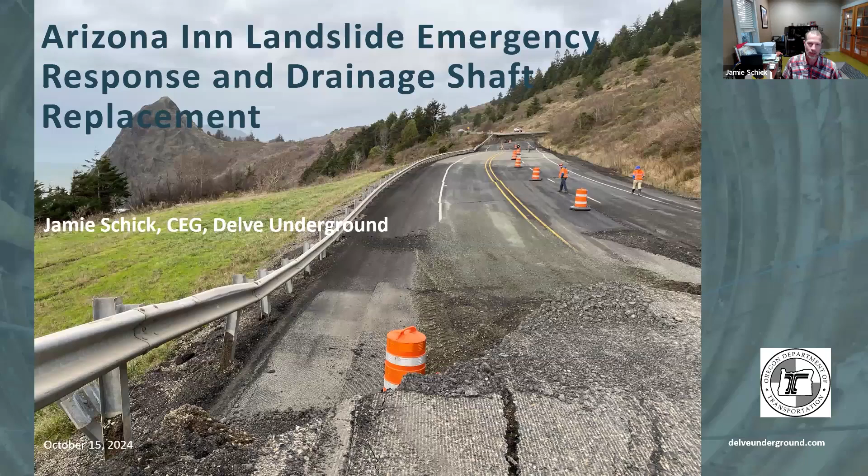This is a project that I've been on and off involved with for many years. It's got a long history that I'll get into today. It's got a fascinating mitigation and some new mitigations that we'll be talking about today. So just kind of an agenda for you. We're going to start with just a little bit of history. What happened in the 90s with the initial mitigation of this slide, some of the work that they did once they started seeing additional movement, and then get into a failure from January 23, talk about their initial response, and then what we've done since then with more additional mitigation out there.

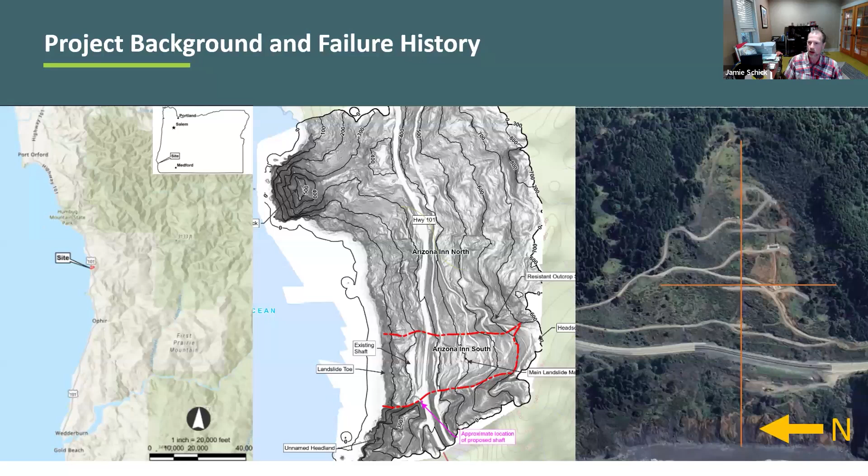So just a reference for everybody, you can see on the left, we've got the Oregon coast. This is down near the California border. The site's on Highway 101 in a very remote part of the state. The central image gives you a sense of the general dimensions of this slide in red, and then as well over on the far right, just to get a bit of a sense of orientation. It's about a half mile long and about a third of a mile wide.

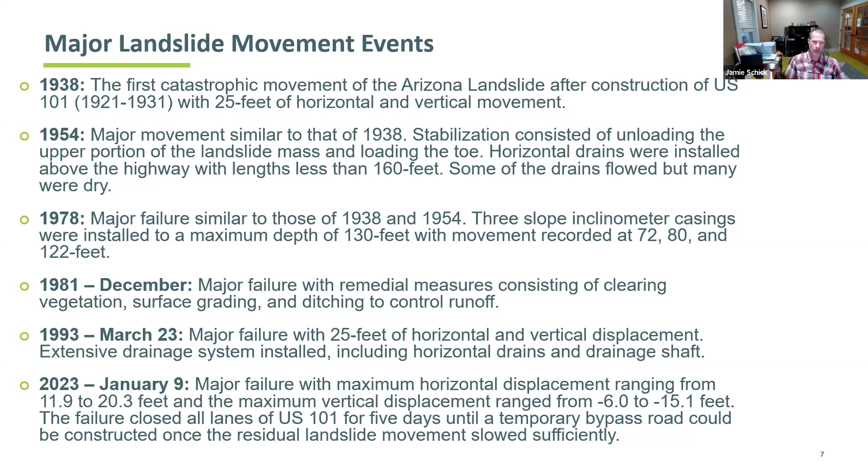So this slide's been active really since they built the road, and every 15 to 20 years it's had some fairly substantial movements that have shut the road down. In the 1950s, they moved about 500,000 cubic yards off the top, trying to unload the landslide. Which again slowed, but again it failed in 1993, which precipitated a major mitigation, and then of course the January failure last year that we'll be talking about today.

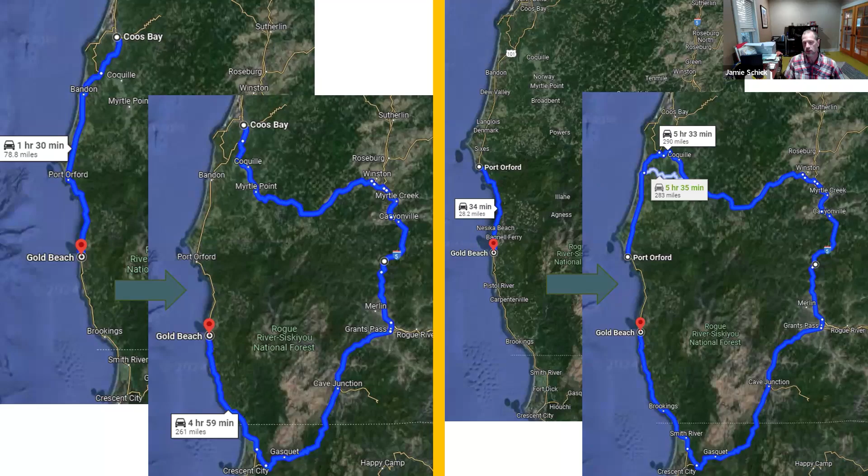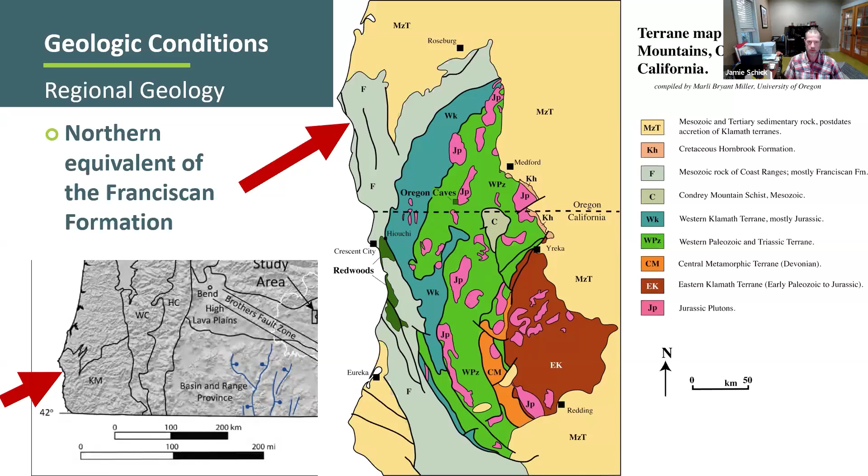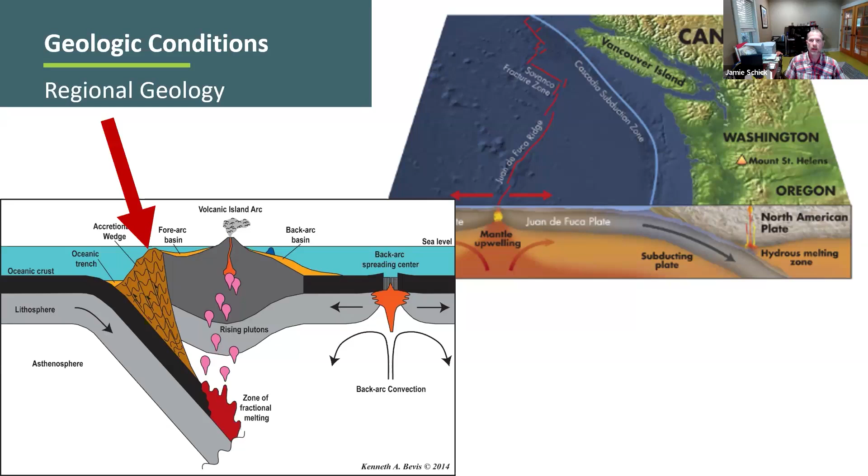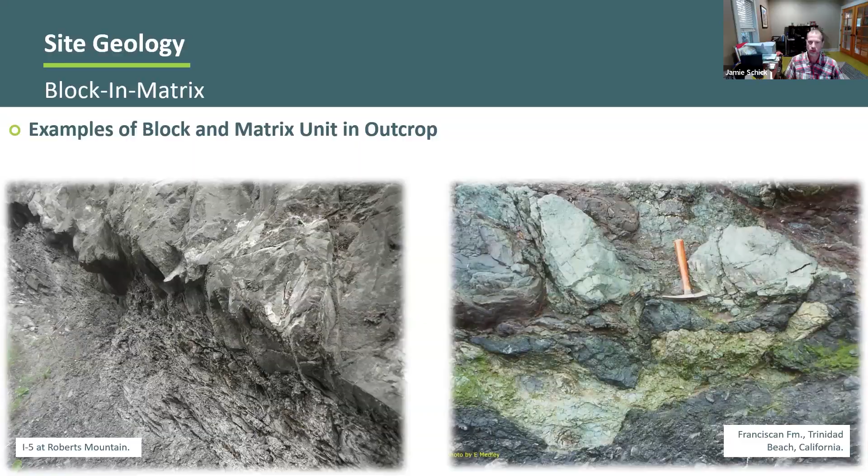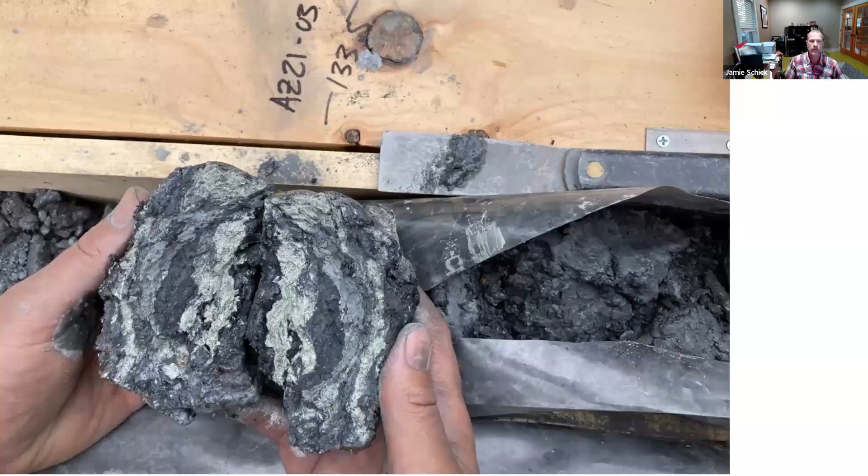There's another sample. These are all samples from the project that we collected last year. And just one more example of the kind of material that we're pulling out of the ground. So this is another view. This is a hillshade image of the site. We're really talking about what's also known as a block and matrix material, so blocks of material in a fine grain or mixed material matrix. And the scale of this goes from a hand sample that you just saw to huge blocks.

The arrows are pointing to large blocks that are in an even larger landslide that is slowly moving towards the Oregon coast. And rafting along in those are blocks on the order of 1,000-foot thick, 2,000-foot thick. So the scale is quite large here. In fact, one of the largest ones on the site is this one right here. This is a large block of sandstone that most likely prevented the landslide from moving further to the south.

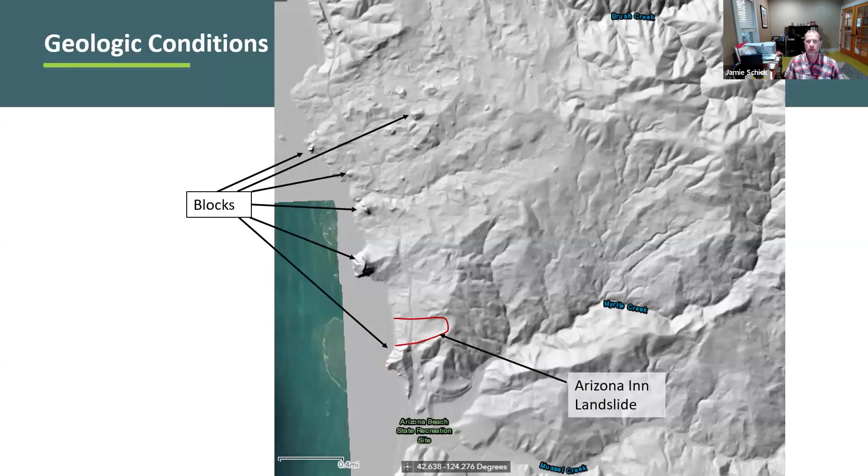Some of the unusual parts about this is that the toe of the landslide has a very steep face and is being very actively eroded away by the ocean. That's one of the challenges to the site and stabilization: we keep losing the toe material, the buttressing material is being washed away. Access is extremely challenging, so doing work on that face is very hard, if not impossible.

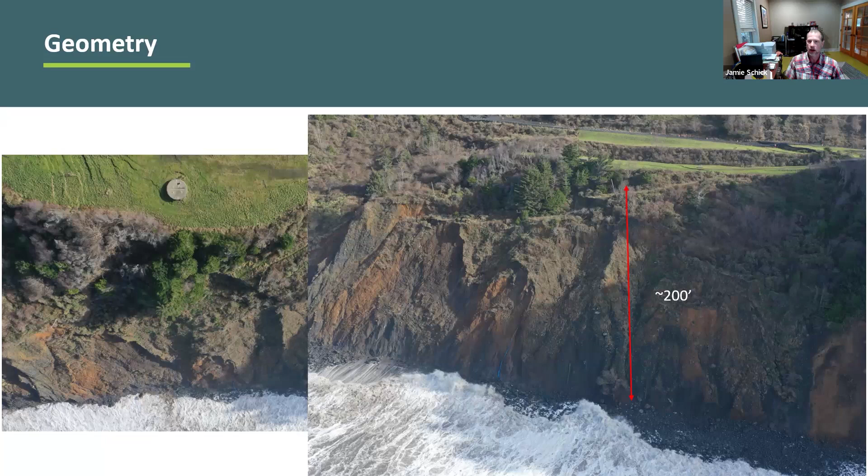So following the 1993 failure, the Oregon DOT decided that enough was enough, and they brought on Squier and Associates, who conducted a fairly in-depth investigation: the typical borings, inclinometers. They actually did pump tests to understand the hydrogeology better, because of the issues with putting a buttress in or anything along those lines. And they ultimately decided that drainage was a viable option.

To address the lower portion of the slide, they installed drains through a shaft. They built a 200-foot deep shaft, about 18 feet wide, in the middle of the landslide. Then they sent a work platform down and drilled horizontal drains from 3 separate work platforms and put in about 30,000 feet of drains to try to dewater the landslide toe.

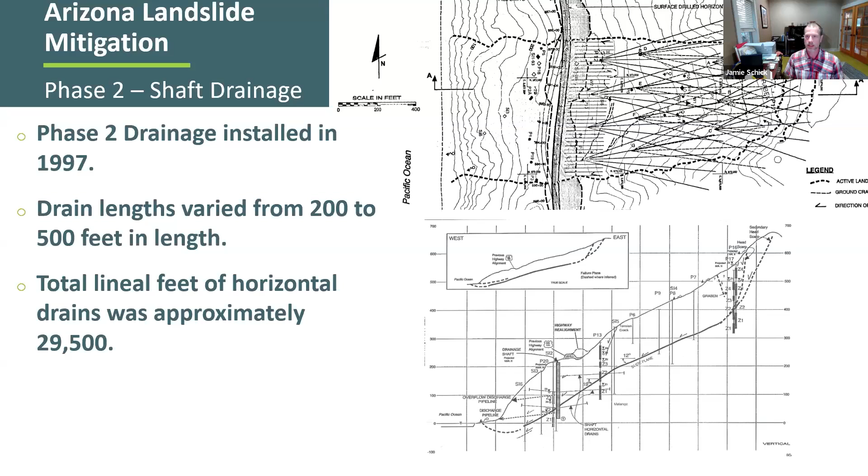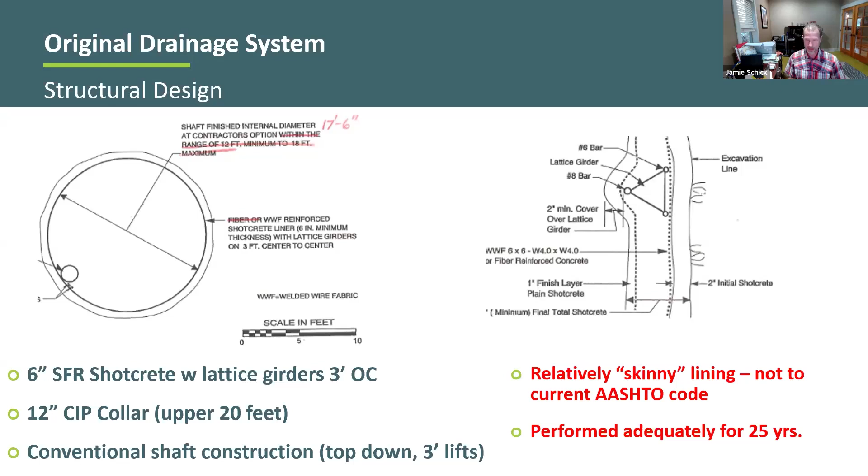From a support standpoint, the original shaft had about 6 inches of shotcrete with lattice girders on a 3-foot center. There was a collar at the top. The structural engineers that I work with consider this a relatively skinny liner, but it did hold up. It's actually still out there, at least parts of it, and so it did its job for close to 25 years.

So in the mid 2010s, they started seeing more deformation of the roadway, and concerns about what's going on. Is the system starting to reactivate? There's also movement in a larger slide to the north. You can sort of see it; the whole thing is outlined in red. That's called Arizona North versus Arizona Inn. The whole site is called the Arizona Landslide Complex. So they wanted to take a closer look at the whole site, understand what's going on out there, and whether there were other issues they needed to be concerned with.

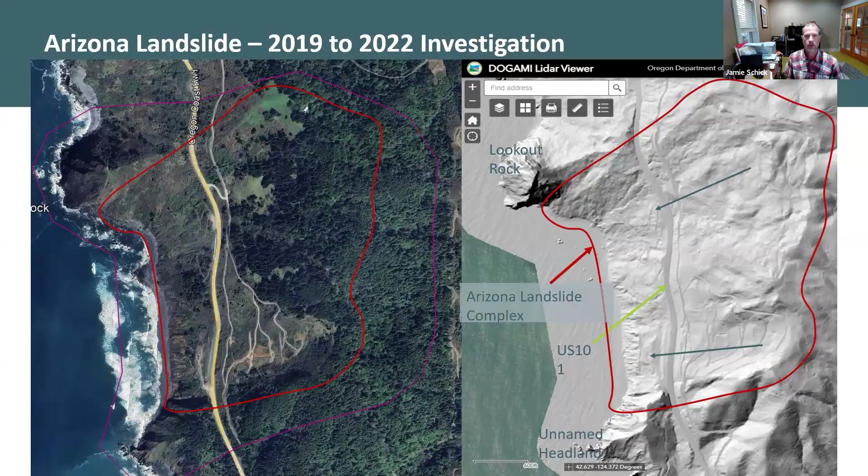One of the first tasks was to install a larger network of borings with instrumentation, so inclinometers and vibrating wire piezometers. They put in an additional 8 boreholes spread across not just Arizona Inn but also to the north, to get a better sense of what's going on out there. Are there areas where they haven't done anything that they need to be concerned with?

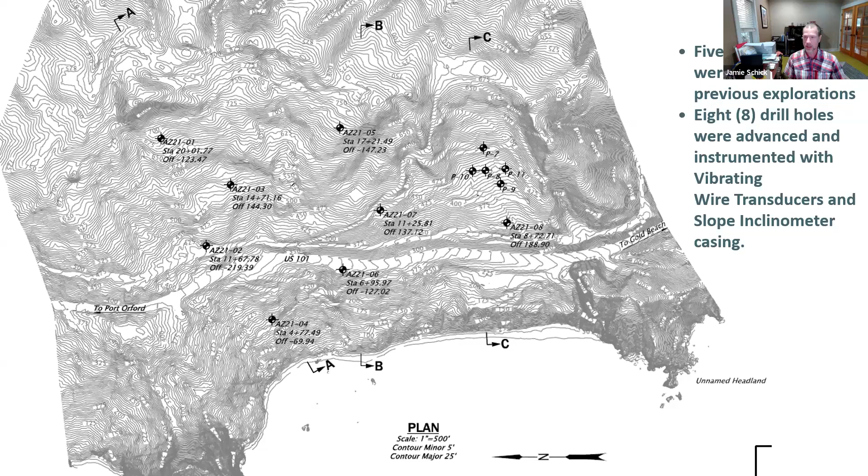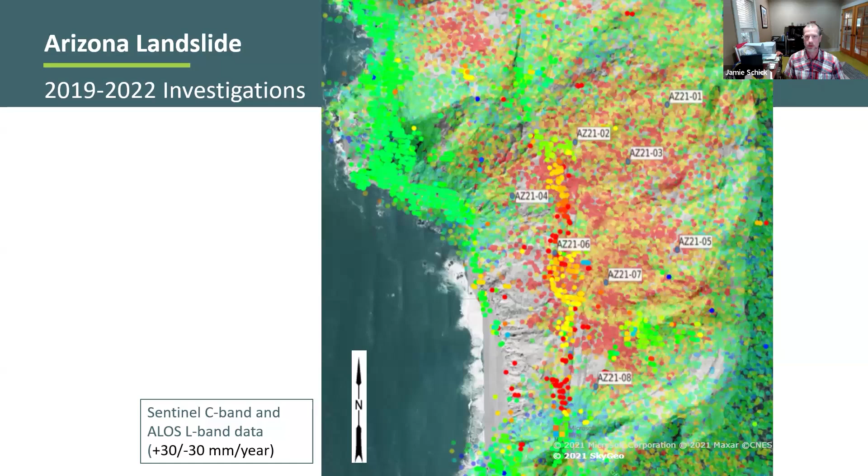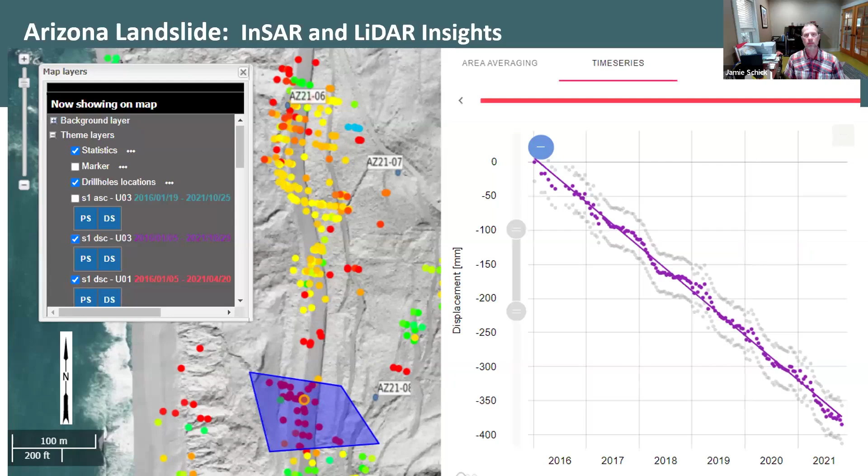We were fortunate that there were several rounds of LiDAR that have been flown for the site. So this is change detection. LiDAR is a scanning technology that uses a laser to scan the ground surface and create a topographic rendering. If you do that more than once, you can compare the two to see if there's movement. Again, red is moving, and blue is actually sort of showing negative movement, or moving in.

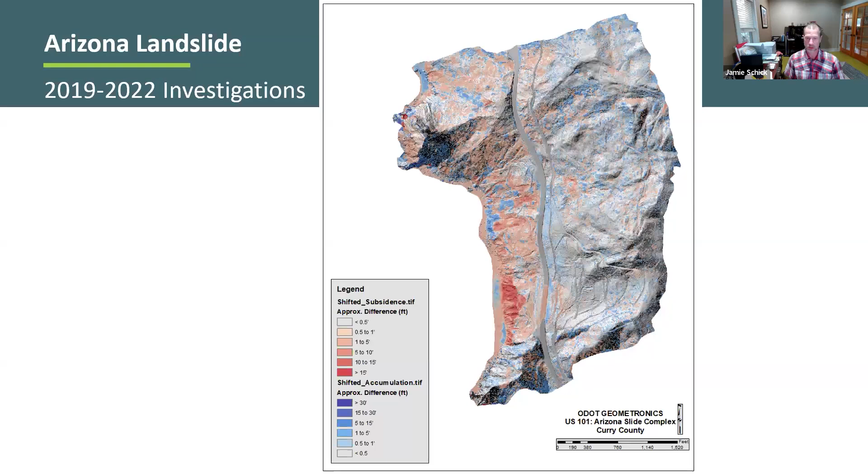So there's a lot of scatter here, but you can certainly see at the toe a fair bit of activity, mostly probably related to coastal erosion processes. So the conclusion was that there's still movement going on, that the landslide is more sensitive to water events. Toe erosion, as you saw in the last slide, the red area there, was a very active process and a major concern here, and that the current drainage system was not functioning as well as it had been.

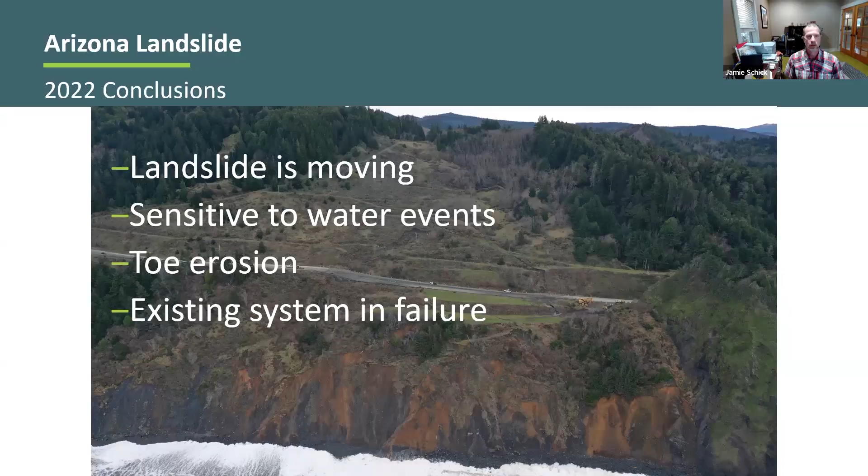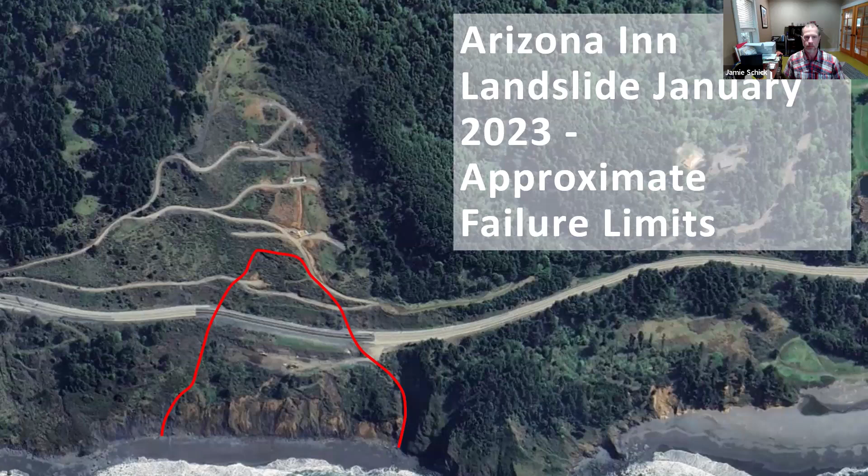So it's always good to look back at these, and hindsight is 20/20. So the two images here are the change detection and also the InSAR data on the right. And it's pretty obvious where most of the movement is occurring. The challenge to the InSAR technology is that if there's too much movement, it actually gets beyond the level of the instrumentation being able to monitor. And so you're left with this: is that because there's nothing happening here, or there's a lot happening here? And obviously there was a lot. These shapes match up quite well with the actual failure.

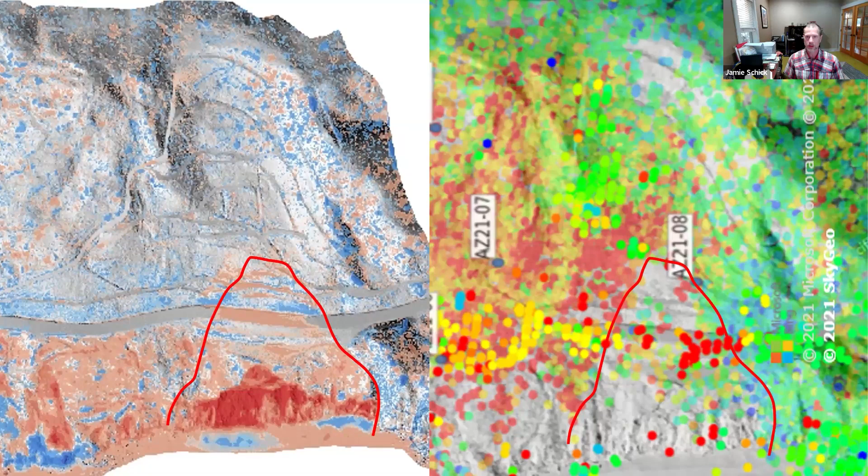So just a bit of a recount. The start of the 2023 year was a really wet start, and they started seeing movement really early in the year. It started moving even more. By day 8, they had up to 3 feet of offset. They were trying to keep the road open, and then early on the morning of the 9th, the entire road just failed out and shut the highway down. The red arrows are showing the lateral scarp in the foreground, and you can see the lateral scarp in the background that we saw the picture of earlier with the guardrail.

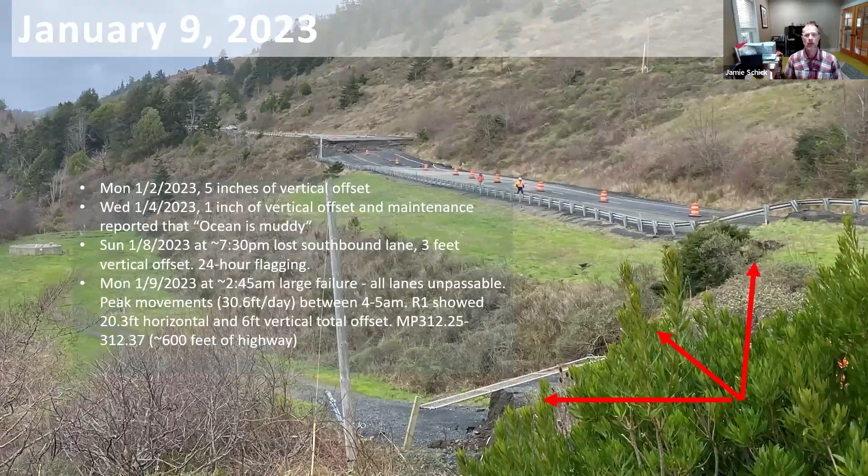So initial response, people mobilized very quickly out there. They were worried about mobility, especially for emergency vehicles. Unfortunately, the hospital's on one side and the patients on the other. So you can see that they've built this one-way lane on the top. But several days into it, everybody sort of took a pause and realized that no one had looked at the shaft. And so they got a crane, lifted the top off the shaft and looked into it, and there was about 50 feet of water in the shaft. And the shaft was no longer 200 feet deep, it was 140 feet deep. So the landslide had indeed sheared the shaft and was now ponding water.

This is a bit of a cartoon for what we believe has occurred. And you can see that this shaft was literally just sheared off 140 feet down. That precipitated mobilizing some pumps and starting to drain that shaft. Obviously, it's probably pushing water back into the landslide, so it's actually contributing to the water pressures in the slide mass now. So they need to get that water out, and that pumping has been ongoing since that failure.

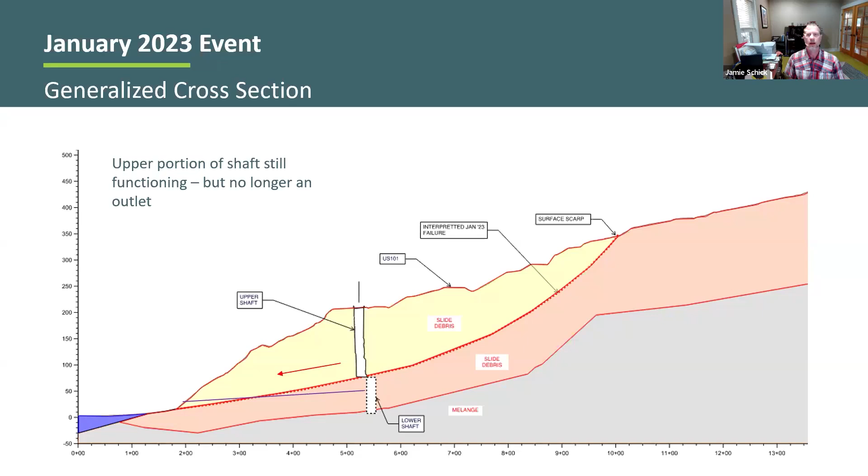So part of the initial response was to reestablish instrumentation. Obviously, everything had been obliterated with that level of displacement. So they had added 14 additional boreholes across the landslide, both above and below at the lower portions. They were fully instrumented with vibrating wire piezometers and slope inclinometers, just to start to reestablish an understanding of what was going on. That was started in late March and went through June of 2023.

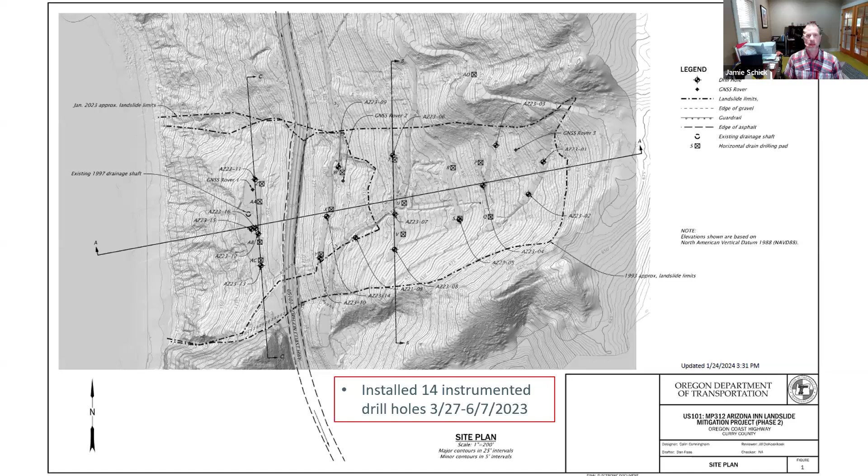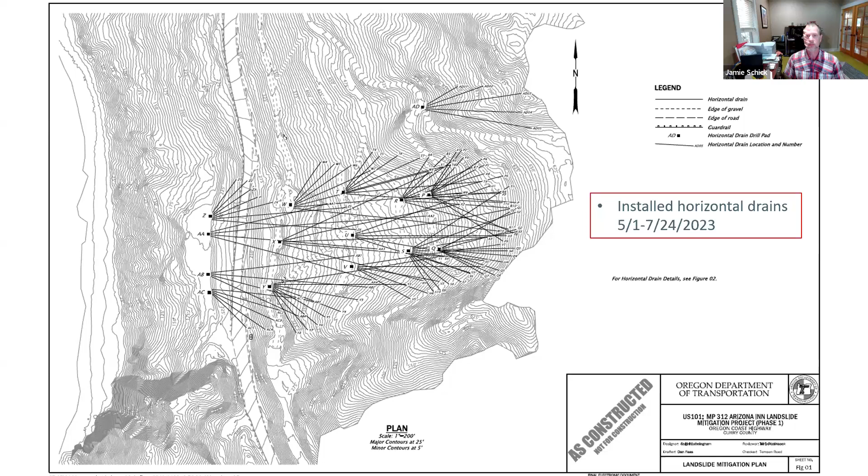They also assumed that all the horizontal drains were no longer functional or were severely damaged. So they initiated a replacement of the drainage system. That started in May of '23 and went through the summer. That was quite a network. They installed about 30,000 lineal feet of horizontal drain from a series of pads all the way up the upper portion, again, the lower portion not being accessible because of the steep face on the downslope side. There we go. So, 39,000. You can see here the network that they're doing.

So all the drains were connected to a system of piping. And they also established a fairly elaborate ditching system to try to, again, get the surface water off and not let it soak in. That was all piped and taken down to a little ravine on the south side of the landslide to drain out into the ocean.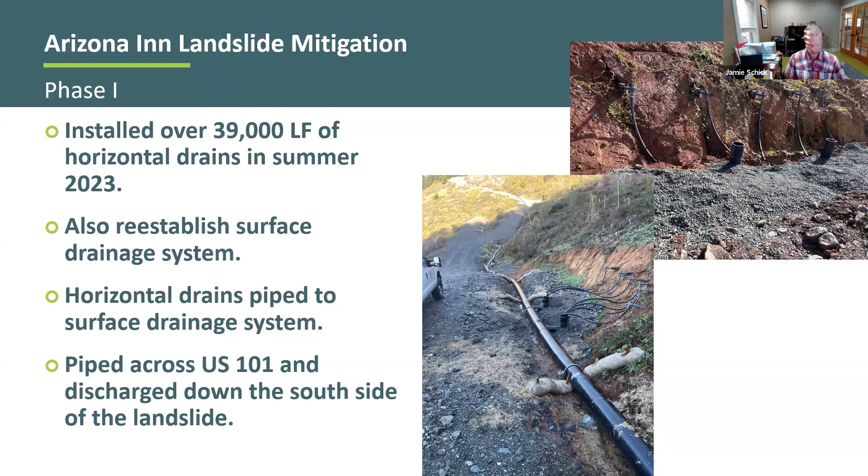So at that point, ODOT recognized that they needed to deal with the lower portion of the slide, particularly because so much of the recent activity wasn't really being drained by the phase 1 system. So Delve Underground was retained by ODOT and asked to help them with the design of the shaft and the lower drainage system to stabilize this landslide. So one of the first things that we did was, obviously, site visits, and put together some ideas about what we might do there.

Initially there were sort of three options that we came up with. ODOT directed us that drainage was what they wanted. Buttressing was really not on the table because of the logistics of getting on the coast, access, and as well a variety of permitting and environmental constraints for the project. So the first option was, could we just go back down and rehab the existing shaft? Maybe we deepen it, you might have to enlarge it a little bit, make the liner a little bit more robust, but you've already dug most of that hole.

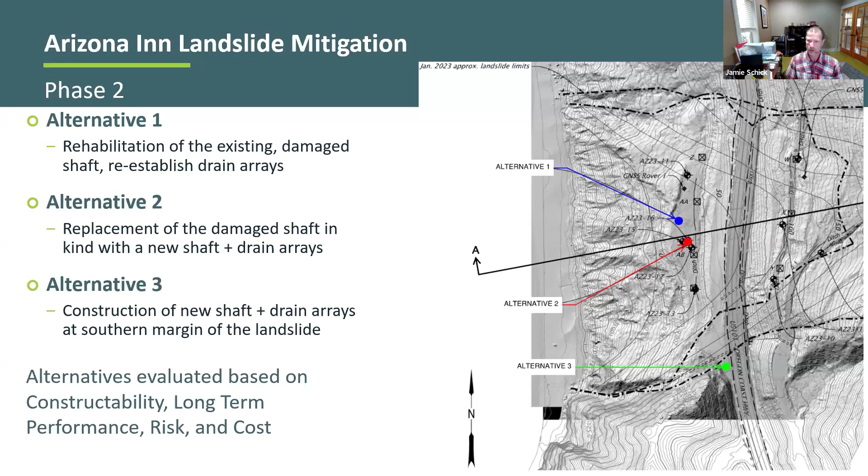So the next option was to put one right next to it. So just step off, put a new shaft in, do a similar drainage array radiating out from that, but that still keeps you in the middle of the landslide. And then the third option was to go over to this bedrock outcrop, get off the landslide, and then drain from the side to try to preserve the shaft. So if there's future movement, you might lose your drains, but you still have the shaft, which is your most expensive piece of infrastructure.

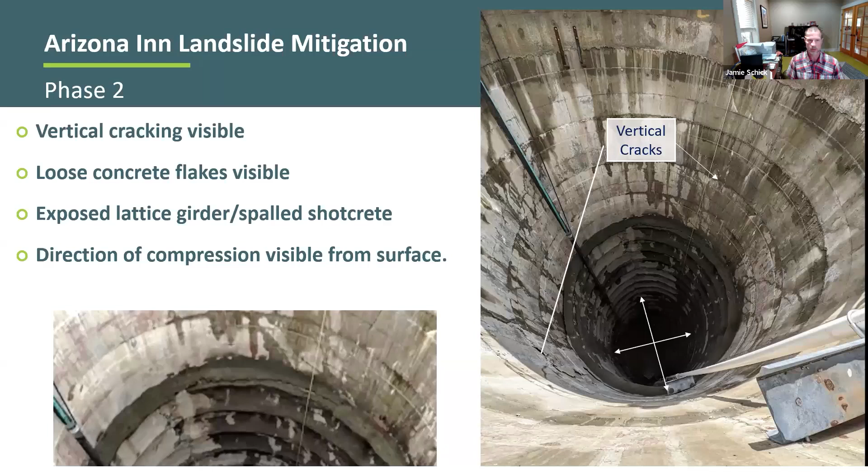One of the other things we did very early on was, of course, go out and do a site visit. The shaft showed visible signs of damage. Even from the surface, you could see that it was no longer round, and in some places some of the lattice girders had popped out of the shotcrete or were sheared. We did a scan of this, so we got a laser scanner and we lowered it down the middle, basically the same scanning technology used to scan manholes for sewer systems and water lines. And we got a great view of what's going on down in the shaft.

And you can see the sort of sections. You can see the shears of the shaft that have occurred. There's one here, and then there's another one down here. The whole shaft is listing to the northwest. And then here you can see where we start from a relatively circular shaft near the surface to an increasingly deformed shaft with depth.

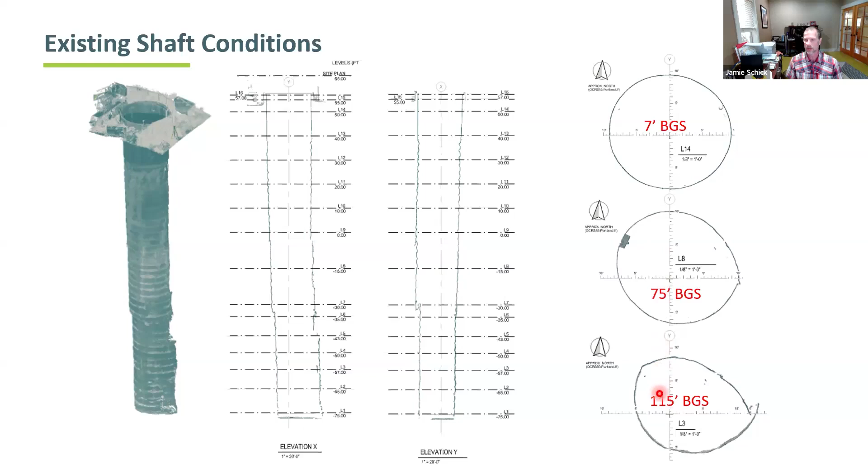So this is some views of these two alternatives. We pretty quickly decided that we're not going to use that shaft again. There's too much damage, too much of a challenge to try to get in there and rehab that, enlarge it, and make it the size that we need to get a drill rig in there. So the two options that we were left with were one, again, a shaft coming in from the center of the landslide, and then a shaft that would be installed over on the right from the side of the landslide.

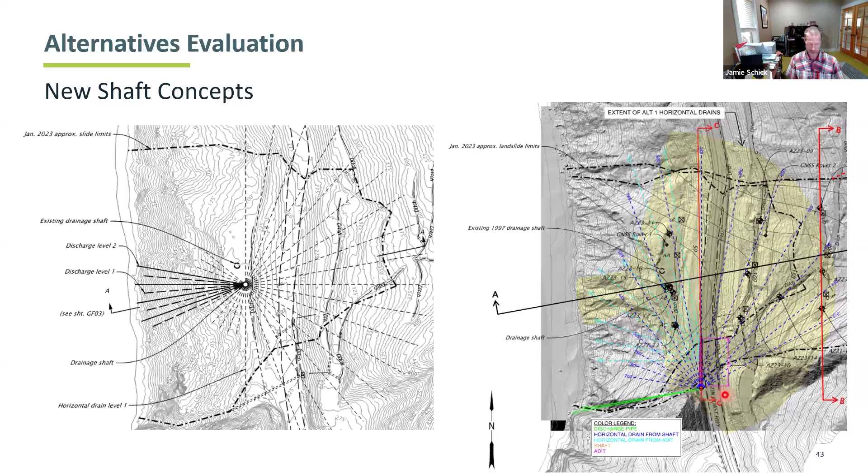So that would be alternatives 2 and 3. Not going to go through all of these. No option is perfect. I think the consensus was that there were some pretty substantial safety concerns associated with putting a shaft in the middle of an active landslide, that we can't tell you when and how much the slide might move. Challenges working in the wintertime with a partially completed shaft or a partially completed drainage system. So some fairly substantial logistical challenges for alternative 2.

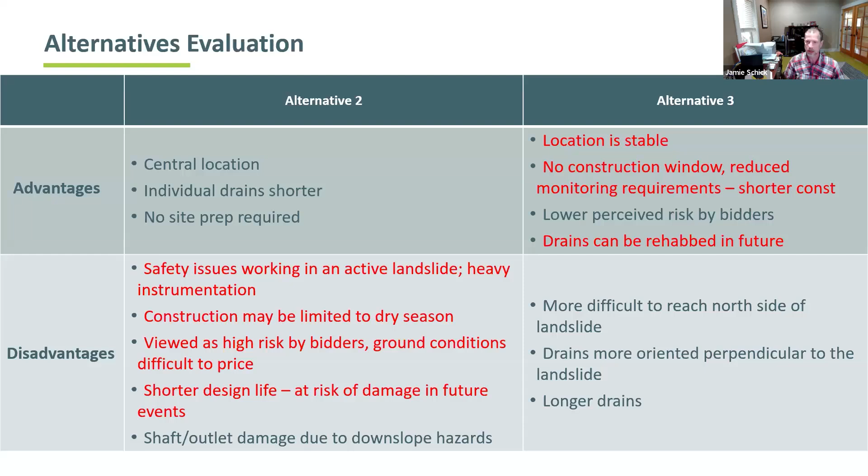Alternative 3, obviously it's stable ground, so that's a huge benefit. You could go back in if you lost your drains and replace them, but the drains are much longer. So we're looking at drains that are upwards of 1,000 feet to get across this landslide. So it wasn't like there was a perfect solution for this, but

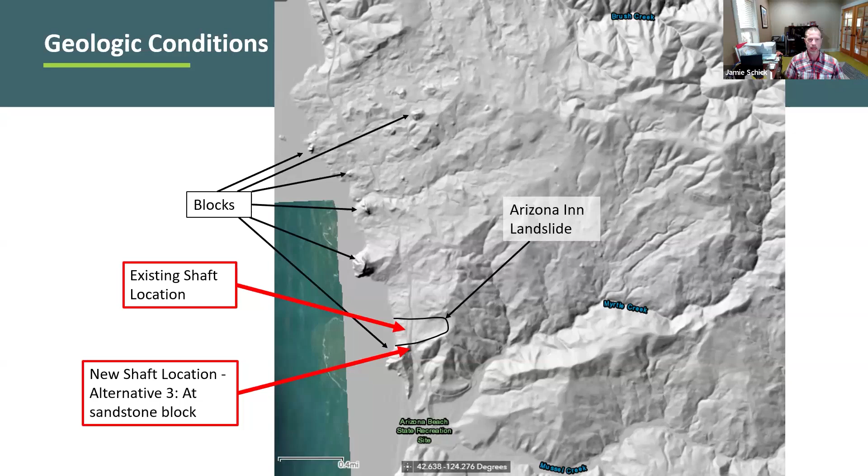ultimately we did decide to go with option 3, just from, I think, perhaps most, you've saved your infrastructure from future movement, and B, the challenges of getting contractors to do something like that just seemed like a very steep challenge. So we moved this shaft into what we thought was a very large sandstone block. So getting off the landslide, similar blocks you can see across the site.

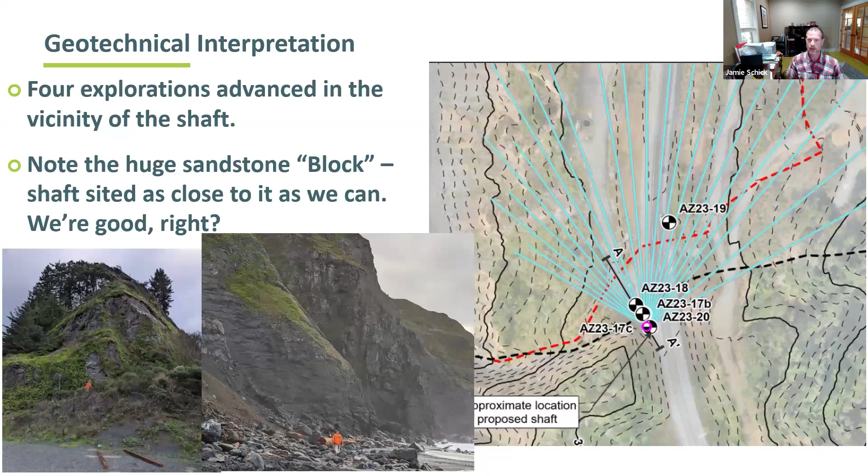So we had a variety of ideas of maybe a drainage gallery at the bottom or a short tunnel to improve access to get underneath the landslide and drill up. However, Mother Nature and block and matrix material don't always cooperate with the geological model that you put together.

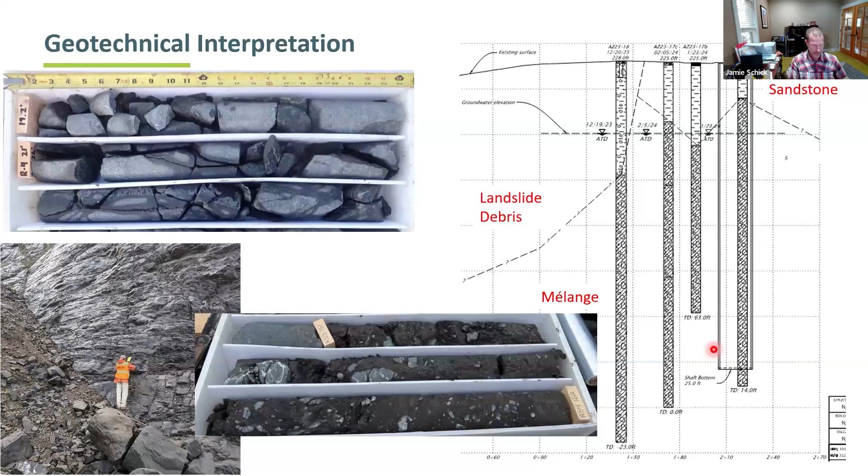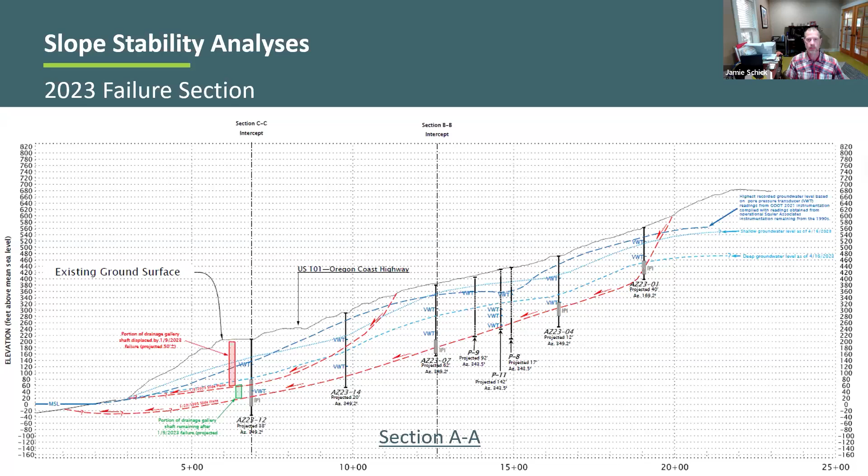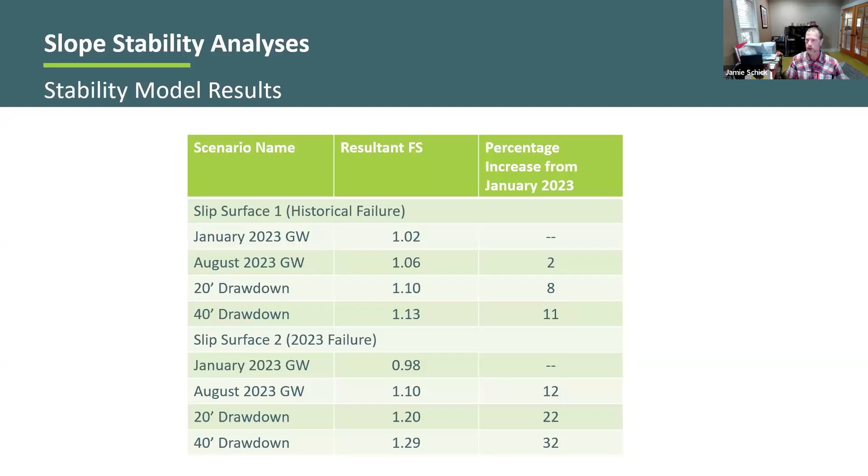So modeling results, this is the challenge of large landslide stabilization. They don't really like to be stabilized. They don't like to show you a nice factor of safety improvement or percentage improvement. So the upper part of this table is the improvements. We were basically looking at how much groundwater drawdown do we think we need? How much do we think we can get for this landslide? And for the larger landslide, we're challenged to get much more than 10 to 15% improvement. We're hopeful that the lower portion of the landslide, with maybe a 20-foot drawdown, we're getting a 20-25% improvement in overall stability.

One of the benefits that we had for the project was that we did, at least in some cases, instrument prior to the installation of the horizontal drains. So we had an opportunity to say, okay, what are the drains doing? How much benefit do we get out of this? And thus we can look ahead and say, well, maybe if we put this much drainage in, we'll get this much drop in groundwater levels.

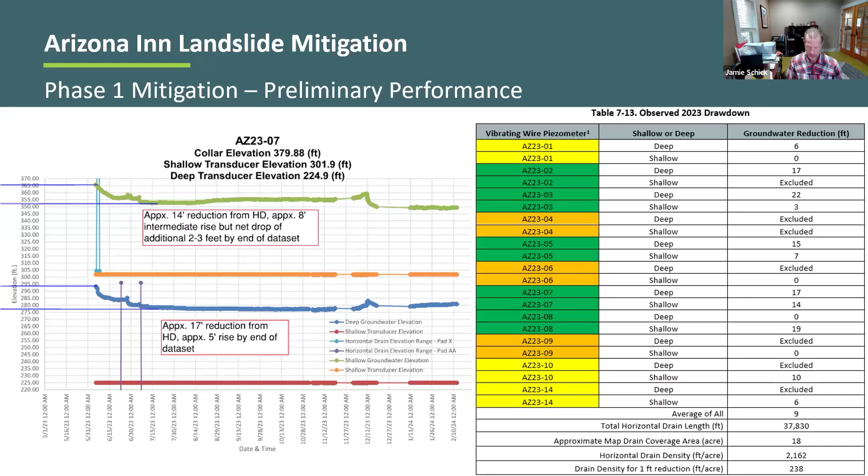So just to close on that, essentially what we did was look at this from the standpoint of drainage density from a surface area standpoint. And if we're shooting for 20 foot of drawdown, particularly in the lower portion of the landslide, that came up with about 60 to 65,000 lineal feet of horizontal drains that need to be installed. So what does that look like?

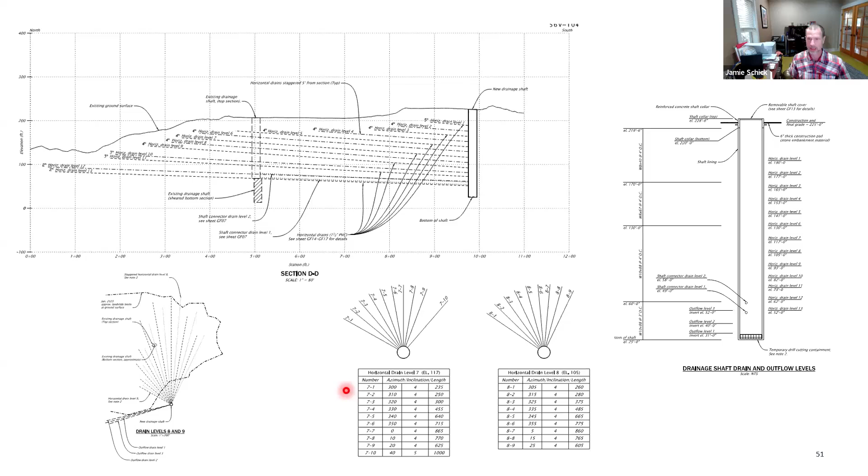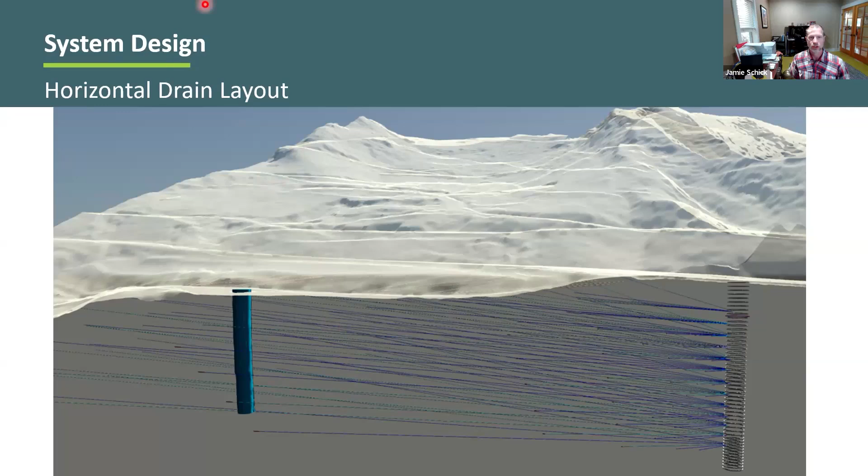So just a little more of a cool view of 3D rendering. We basically built a model in Revit and modeled the drains. We built a model of the surface of the landslide underground, and used that to help guide where we needed to extend these drains to, or where we could stop. And for sure, some of these drains will hit the old shaft, even though we've worked very hard to try to avoid that.

So what is this going to look like? From a sequencing standpoint, this will be using ring beams and shotcrete for stabilization. After we've got a collar constructed, we'll excavate down 4 to 5 feet, install another ring beam, put in some temporary shotcrete, and then continue down with the next level of excavation and another ring beam. So that's the first round right here.

And then we'll continue down about 20 feet, I believe is what we've called out in the plans. Then you have to come back and install final liner before you go any further, and then continue all the way down to the bottom. Following completion of the shaft, the idea will be to install outlet drains to the ocean. Obviously, if we're bringing the water in, it's got to go somewhere, so there'll be drains going out to the ocean.

We're also going to have drains from the existing shaft to the new shaft. The existing shaft is still doing some good. So we'll add drainage that goes from that shaft, comes back to the new shaft, and then out to the ocean.

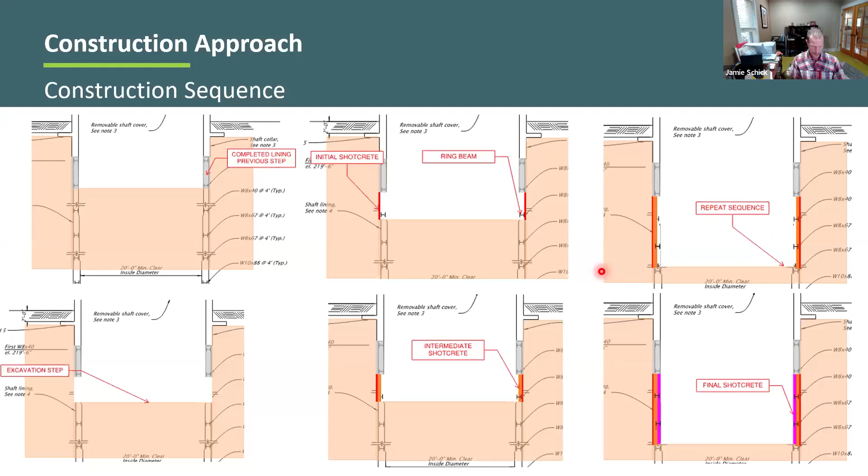This is a more detailed view of the lining system. You can see the ring beams here in section, basically an H-pile turned into a ring. They'll be in quarters, so prefab, lowered down, bolted together in place, and then shotcrete installed. There'll be one set of rebar that goes in on the inside of that, and then we'll also have a collar at the top that will start the whole process off.

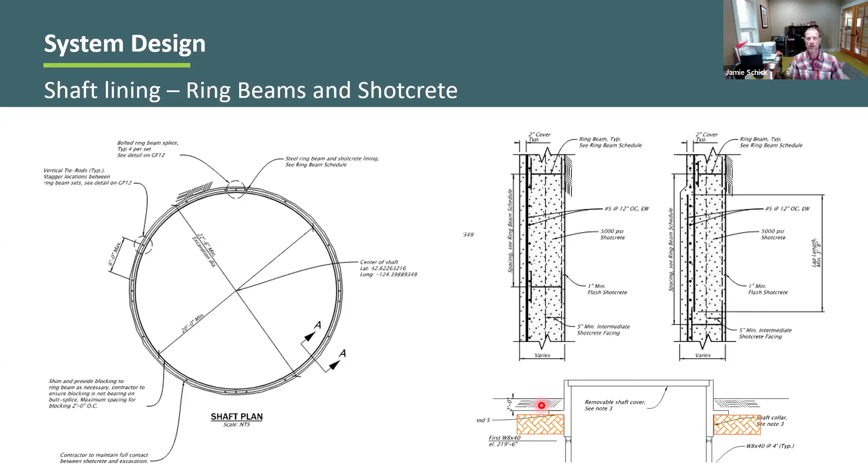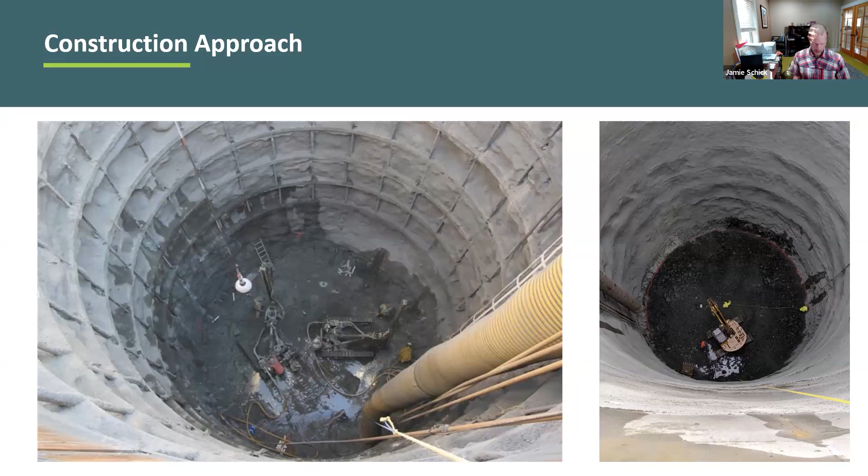So I'm a little ahead of schedule. Apologize for that, folks.

Right now we're looking at bidding out. It's actually out to bid as we speak today. It's going to be probably notice to proceed in early 2025, with construction starting in early mid to late spring.

We anticipate this to be shaft construction for a good share of next year, and then the outlet drains going in, and then the horizontal drains. That'll be a fairly major part of the construction project. Obviously, 65,000 lineal feet of drain is not a trivial task, but hopefully by start of the winter of 2027 it will be fully mitigated.

I think I'm actually at questions. Okay. I only see one question in the chat so far, so maybe people can type in more. So sorry, I'm going to go to the question, Jamie. Are you ready? Yeah. Okay.

So you use InSAR to map movement, right? How do you measure the movement? What software do you use? We didn't actually use the software. A lot of times the vendor will do the processing for you and give you the results. So we didn't do the actual software processing. We had the contractor do that and provide us with the results.

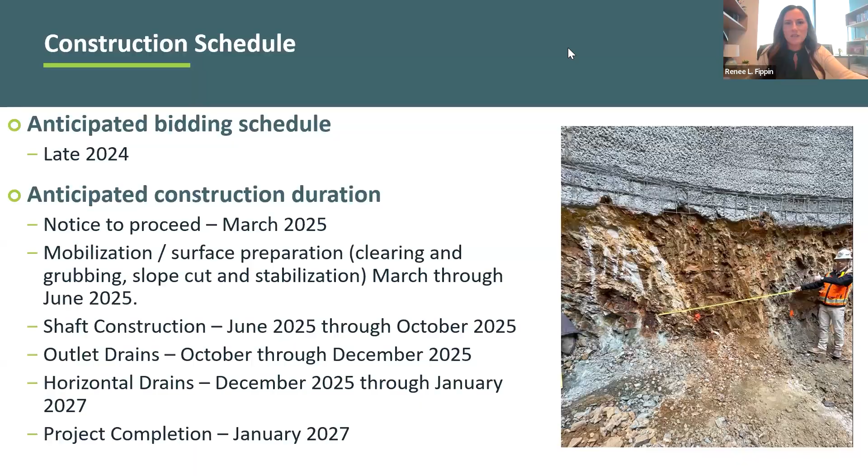We have another question that came in while you do that. I'll wait till you paste it. I don't want to distract you. Yep. You ready? Let's see here. Is that showing up for people? Yeah, I see it showed up.